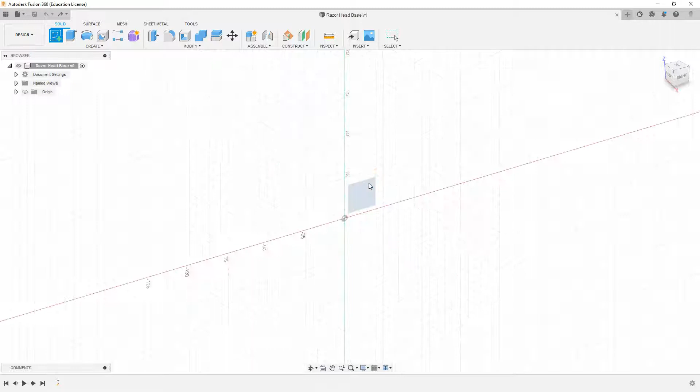Right, so as always, when starting a new model, it's best to save the work before you begin, just to make sure it's set up and correct. This model is a pretty simple extrusion in the main axial direction. So the first drawing we're going to draw is on the YZ plane. So we're going to draw a little box at the origin.

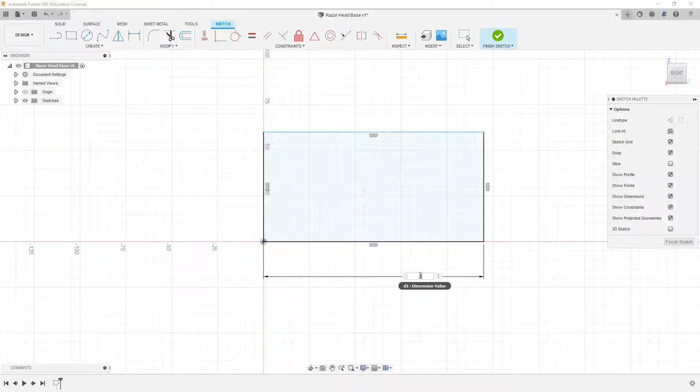Right, now we need to define our dimensions of this box. Those dimensions, again, will come directly from our drawing. Right, so in this case, the bottom dimension is 24.5 millimeters. And we're going to have a height of our piece of 5.75.

And again, those come right from the drawing, so knowing how to read a technical drawing will assist you in pulling out these dimensions. If you're unsure about where I'm getting these dimensions, come by and see us here in the lab, and we can help you understand how to read technical drawings.

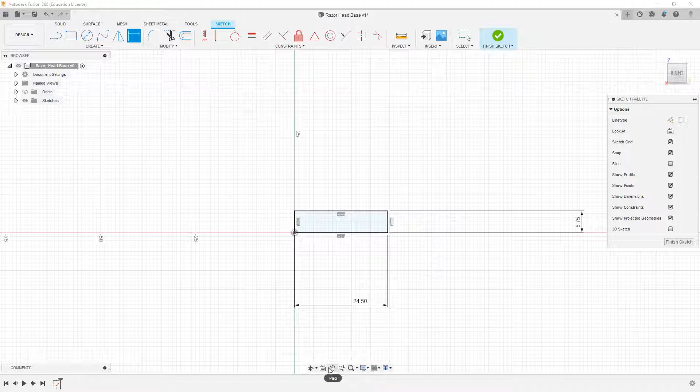So the bottom of our blade holder for the safety razor here is curved. We're going to set that up by using a 3-point arc. Right, so a 3-point arc, you pick the two edges, and then you drag that third point in the direction of the arc. In this case, it's going to be tangent to that bottom line, so we'll go ahead and set that constraint up. So that arc is tangent to that bottom line, so it goes from wherever these points are on the edges to that tangent line.

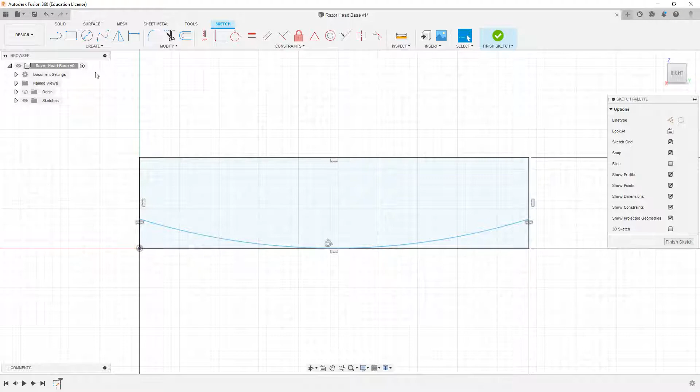We're going to make those points horizontal to each other so that that arc is constantly in the same plane, left and right, so that it is symmetric about the center axis.

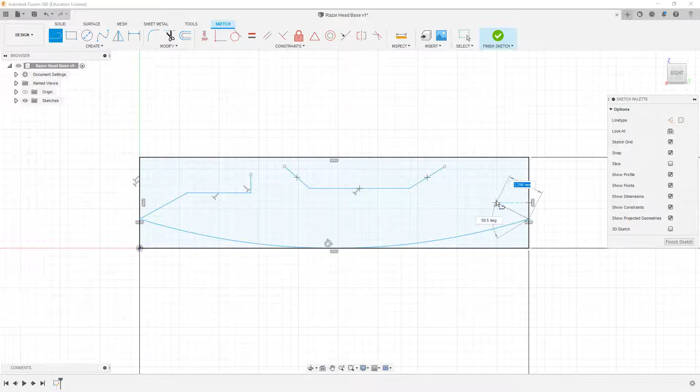Here we see some interior drawings, right? So again, referring to the technical drawings, we're going to draw the side face of that middle piece, the piece that we've labeled number 2 in the technical drawing, the blade holder, right? Not really concerned about the dimensions just yet.

I'm more getting the overarching picture, making sure that it is symmetrical about the center axis here by making the left side and right side equal to each other in all aspects, and then making sure that stuff is horizontal and vertical where it needs to be, right? So making sure that everything lines up horizontally.

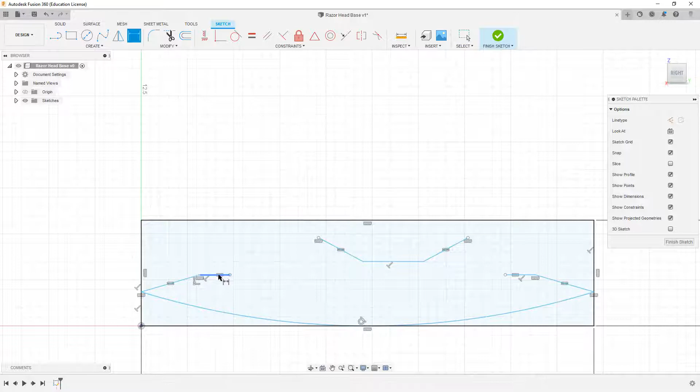Because we set up our drawing in such a way that everything on the left is equal to everything on the right, when we define dimensions for one object, it actually does change the second object. So you can see that 2.8 millimeter dimension on that straight piece did change the left and right side, as did all of the dimensions that we're currently adding.

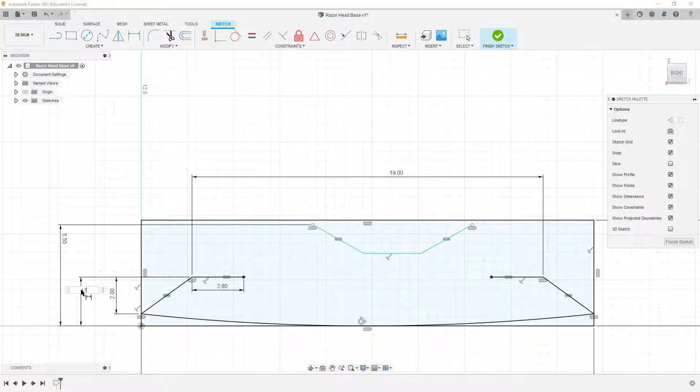And again, these dimensions are coming directly from the technical drawing, so we are using the technical drawing as our guide and using intuition to figure out what these dimensions are if they're not explicitly stated. And we're just going through and dimensioning all the points.

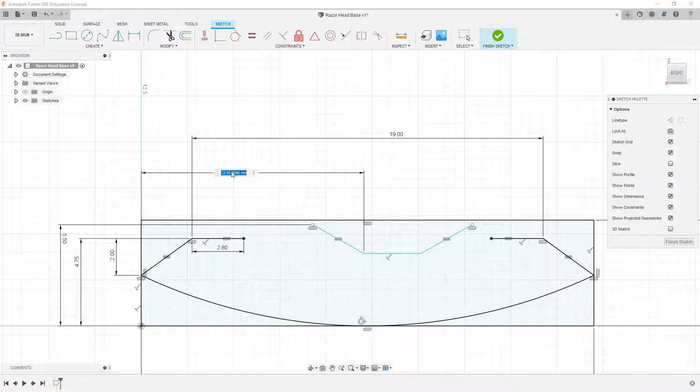Remember, once a line is fully dimensioned, fully constrained, it turns to that black color, so it can no longer be moved in any direction. And then the lighter blue lines are unconstrained in one or more directions. So the goal of creating these dimensions at this time is to make sure that those lines are dimensioned properly, so that they are fully constrained, so that there's no ambiguity about where they're located in space.

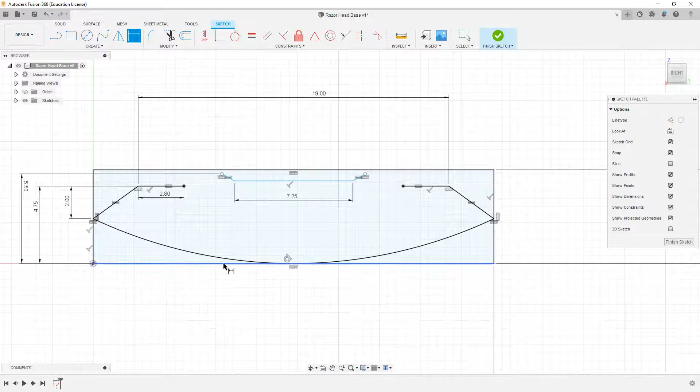One of the interesting things that you can do with dimensions, right? So here we have a dimension of 8.625. One of the things that you can do is you don't necessarily have to put a number in there, right? You can use other dimensions. So you'll see here, I am searching for this full length dimension. I see that it's already been made, right? So let me delete that real quick.

Right? So it's a little bit off. It's off the screen just a little bit, and here we go. You've got to find it and pull it up. So once you've put that dimension, make sure you can actually see all your dimensions in your drawing in the frame that you're looking in, right? So there's the other one. I'll pull it in because I'm going to need that later.

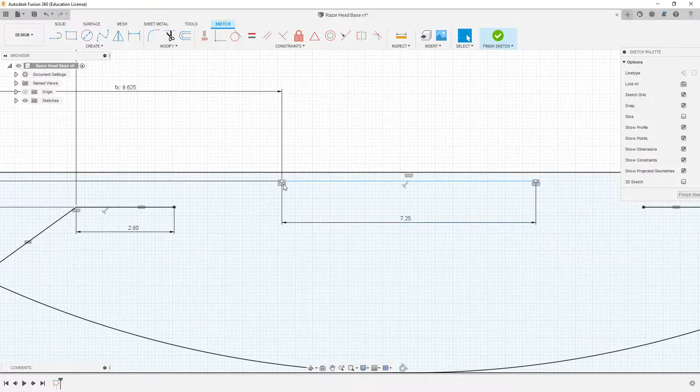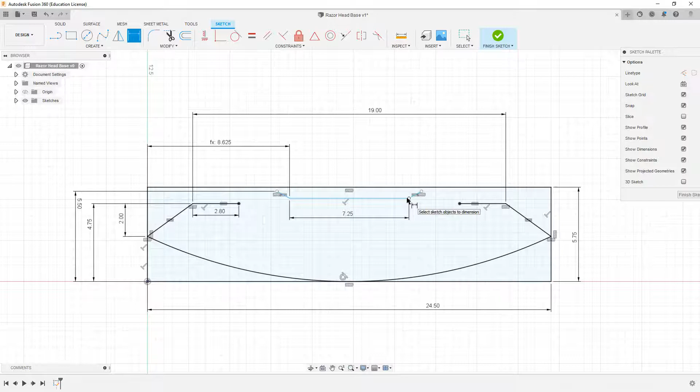But let's say I want to put this vertical line for this in-cut section here. I want to make sure it's halfway between these two, right? I can literally just take that dimension, and instead of typing it out, I click on the dimension I want to use, right? And I want to remove the space that that line takes up, so D1 minus D11. And then if I divide that by 2, that distance is defined as half that space, right?

So you can do math inside of your dimensions, right? They don't have to be solely numbers. So you can make dimensions equal to each other simply by clicking those dimensions inside of that dimension dialog box.

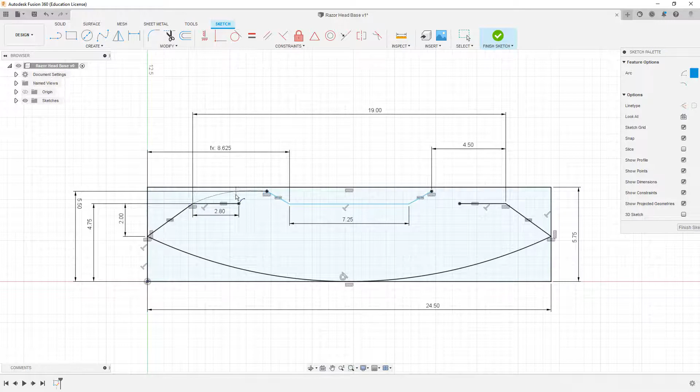So we're going to add 3-point arc here. Remember, this 3-point arc is going to interface with the other piece that we're going to create in the next video, the head of the razor. Making sure that those arcs line up is important to the fit and finish of our razor.

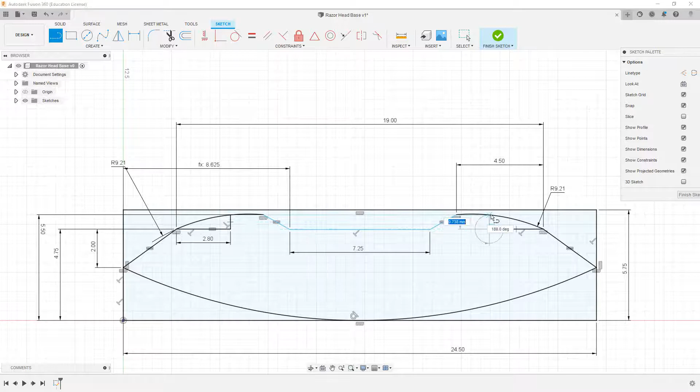Also notice that as I'm going through here, this is not fully defined because those lines are not yet black. Even when I put this dimension on here for the arc length or the arc radius, it makes the arcs defined, but it doesn't make that inset piece defined. So we need to define all the directions of that so that it is completely defined on all dimensions.

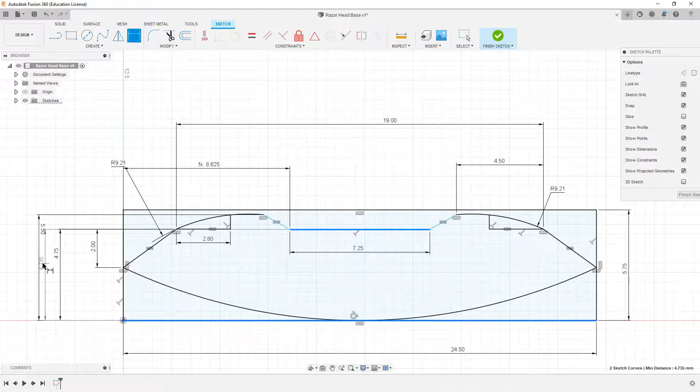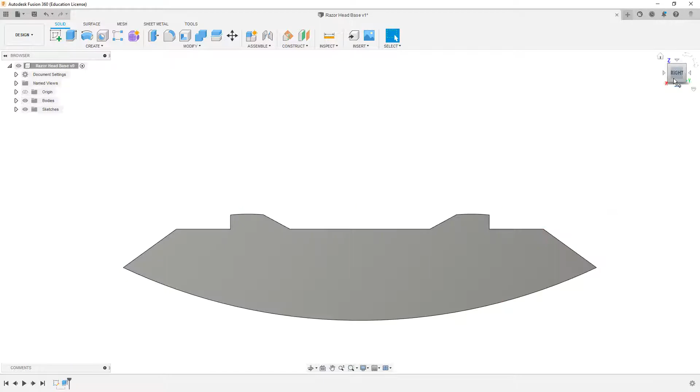So once you're done with your sketch, finish your sketch. Now we're going to extrude just that interior outline, which will create our new part, the razor head base. Right, so we're going to extrude that the distance given on the technical drawings, which is 41.1. Here's our piece so far. Notice that it doesn't have any holes in it, doesn't have any cuts in it. Okay, so we're going to need to add those.

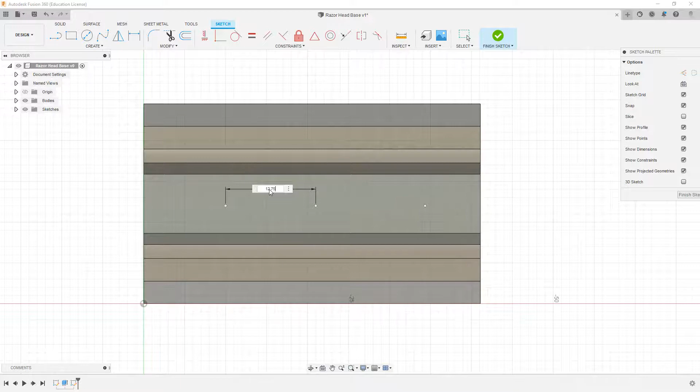So we're going to add a sketch on that interior inset face. To add a hole, remember it's very simple to add a hole. All you have to do is create a point and then define where that point is. So we're going to create our point and then define how far away they are. Once you've defined your points, you can make a hole by clicking on them and creating a hole feature.

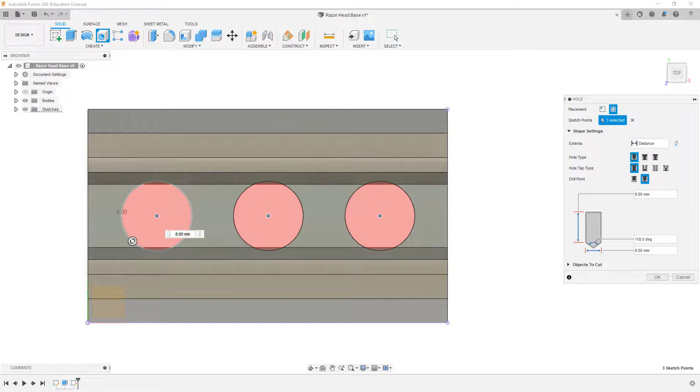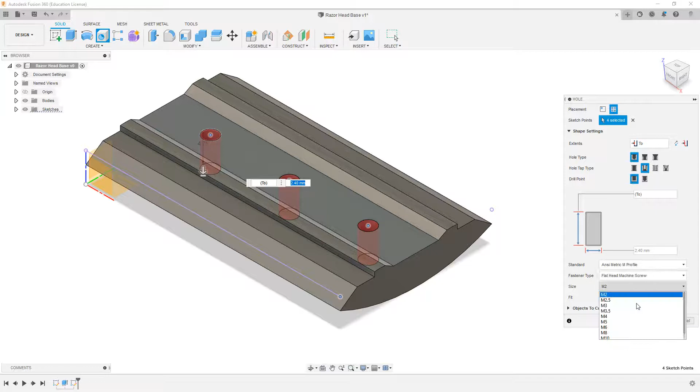Remember, we need to think about what type of hole we're going to create. We're trying to pass a 4mm rod and a M4 threaded section through these holes. They're locating holes, so we're going to go to the actual piece that we have so that it'll go all the way through. So we're going to click on the object that we're going to cut through. And then we also need to make sure that they're clearance holes and that they're clearance for M4. That is a 4mm metric hole. It's the size of threading that we have for the top part.

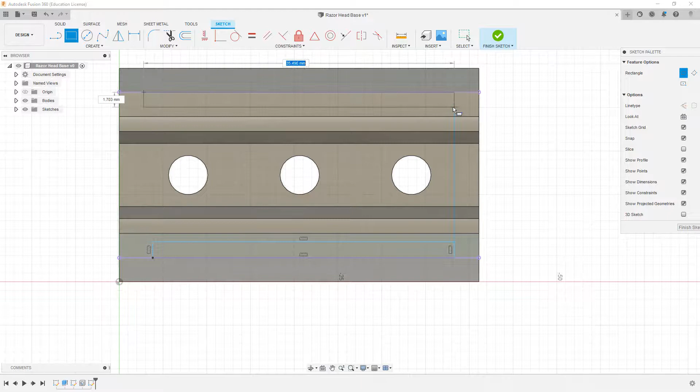Once we have our holes cut, we need to think about cutting the gullet. That is the part of the razor blade that actually lets you get the hair and things that you're cutting out of the blade's path. This is that inset section inside of a razor blade holder. Okay, so it's going to go on that flat section, same plane as the holes, but it's a different section. It has a little bit of a ridge between them. So we're going to draw on that plane. We're going to project the geometry of the plane onto our drawing.

And then we're going to just draw a rectangle that represents the gullets that we're going to cut in that rectangular space. And remember, we want to have symmetry from top to bottom in this case. So we're going to make everything equal, make sure that it's all properly symmetrical. And we're going to use a fillet tool on all the corners. A fillet is a fancy way to say rounding off that corner. We're going to round it off with a 1.5mm rounding. Again, looking at our drawings, we know that we need fillets based on how the drawing is and where our fillet callout is on our drawing.

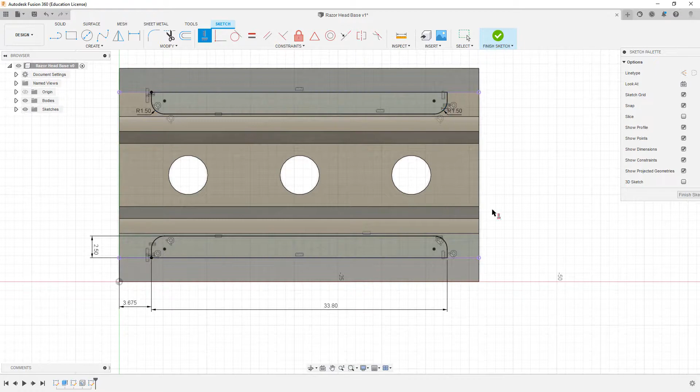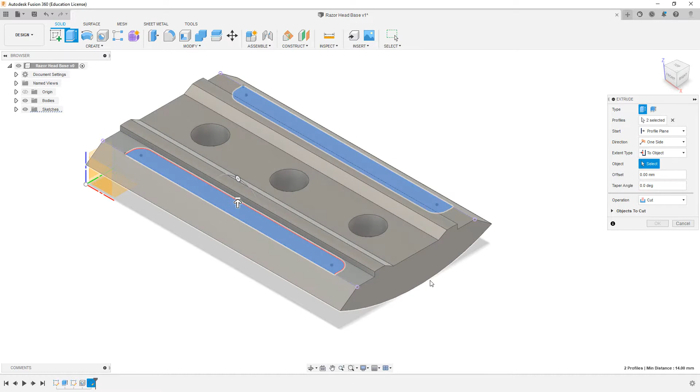Once we have that rounded over, we can define the size of our rectangular space to cut and where the edge location is. Once we've finished our drawing, it's on to the last feature that this object has. We're going to cut that gullet all the way through the part. So To Object, and then we're going to make sure that everything looks proper. Looks like the drawing. And once we are all finished, here is our final razor part. This is the blade holder for our safety razor.

So we'll go ahead and save that. And notice that when we save it, it updates the version number. We don't necessarily need to put a description. Sometimes descriptions are nice in saving. But that is our razor blade holder. So this is another part for our razor.

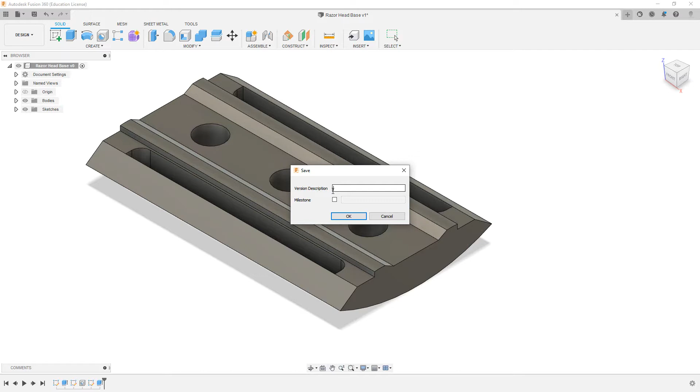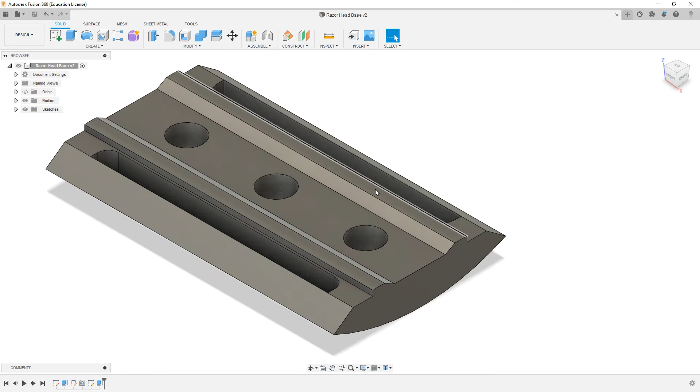And then we will finish this up next video. We'll model the top cap, and then we'll show how to put the razor together in Fusion 360 and how to create the technical drawing that you're looking at on the GitHub page if you are following along with that. And then ultimately we'll show how to create this as a physical object, both 3D printing and, because we have the ability here, we will CNC it out of copper. Or, I'm sorry, we'll probably do it out of brass.